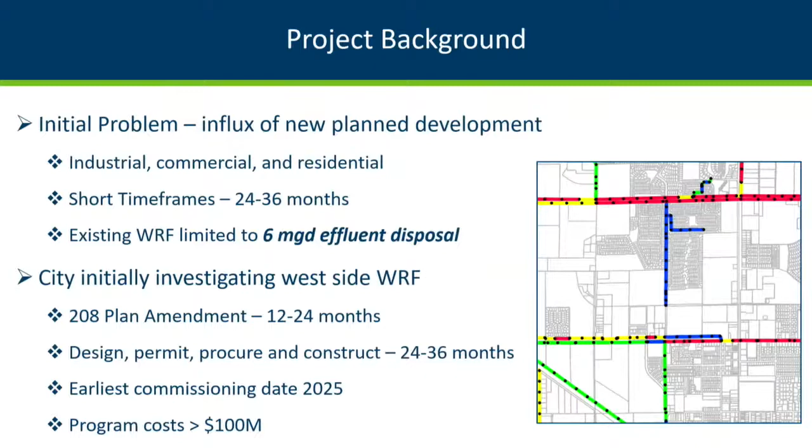So we thought we could come up with some different ideas for that. We did the wastewater capacity study starting, I think, in November, first week of November.

So the new plan that was developed was to design, permit, and construct a new lift station on the west side, because you have a lot of capacity potential at the existing WRF. You have plenty of acreage there, and it's a good, solid plant, so it would be quicker to expand that, and I'll go into that in a little bit.

So if you expand the capabilities of the existing WRF, then you can put a force main from that - that's an old figure there, but that was when we were first working on it - over to the wastewater plant, and take care of the west side that way. The east side is a different issue that we'll talk about in a second.

But then a big part of it was to develop the effluent disposal alternatives, right? So you had to solve that issue about the 6 MGD limitation. We took a look at that, and then we had that goal of getting that infrastructure in and commissioned by 2024. Once we put that all together about how this would work, that program took it down to about $34 million.

We completed that study in January 2022, and then moved into the conceptual design study. So the city said, yeah, we like that plan. Let's take a look at that and do the conceptual design to say, okay, specifically, how will we do that? And let's get closer with the cost estimates, right? So this is conceptual - that was just basically the plan. Let's actually flesh out the concept to see exactly how that would get done.

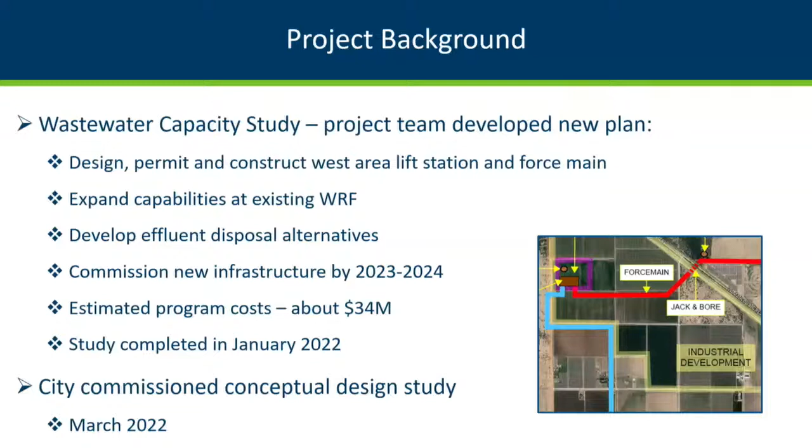And so that's what we started right after that. That was a conceptual design study, which is finished now. I think the final DCR, the sealed version, will be out next week, I believe. We've pretty much done all of that.

So that included background investigations, really go through all the existing documents, look at the utilities that are out there, look at the pipeline routes where we need to have them, look at the wastewater plant, make sure that we could do what we thought we could do, talk with the operations staff. And then have a master planning update, so get all the latest information, working with the planning department, and say, okay, make sure we're accounting for everything that we need to account for. So that was part of the project.

And then there was funding acquisition assistance. We happen to specialize in federal and state grant funding, so we helped with that and got several of those things in progress for the funding acquisition. And then we did the effluent disposal and the reuse analysis, as I talked about, and then finished the design report with the cost estimating and scheduling that I'll show you here coming up.

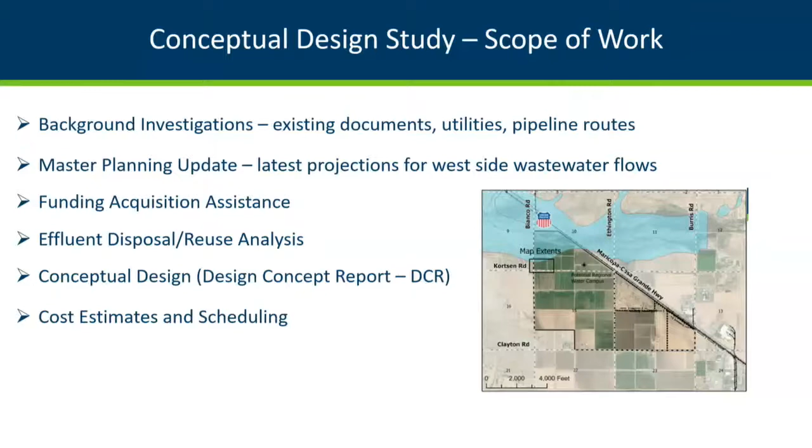Effluent disposal, that's one of the first things we approached. I mean, these were all kind of done in parallel, but that was a very important one. So we had hydrogeologists on board, actually two different hydrogeologists. Originally we thought that the injection wells might be good because they're pretty efficient if you can get good yields out of them, good capacity, but it turned out that none of the 5 sites that we looked at were viable, just weren't cost effective.

So we took a revised approach with the hydrogeologist, and that is, the primary one is we developed a reclaimed water distribution system. The idea is that you have all these new industrial, commercial users coming in, and if we provide them with high quality A+ effluent, that's a very valuable commodity that they can use and will use. So that would be an 18-inch water line from the plant to the far end of the reclaimed water distribution system. It's about 5.5 miles long as a plan.

And then along with that, we have recharge basins at the Cactus mine site. So we talked to them about using their site. That's a proposed thing - not worked out with them yet - but that would provide significant recharge of the aquifer, along with the ones that we're working on and the current WRF at the plant site that are 2.1 MGD. Once they get done, that's in progress right now.

And then, of course, an 8-inch reclaimed water line to the Cactus mine, because they also want to use 1 MGD of water effluent at that site. And that could be installed pretty quickly using horizontal directional drilling, because one of the tricky parts, of course, is getting across the rail and the highway, and that can take a long time. But if we do horizontal directional drilling, we investigated that, and it's completely feasible there, and that makes it a lot quicker and easier to get done.

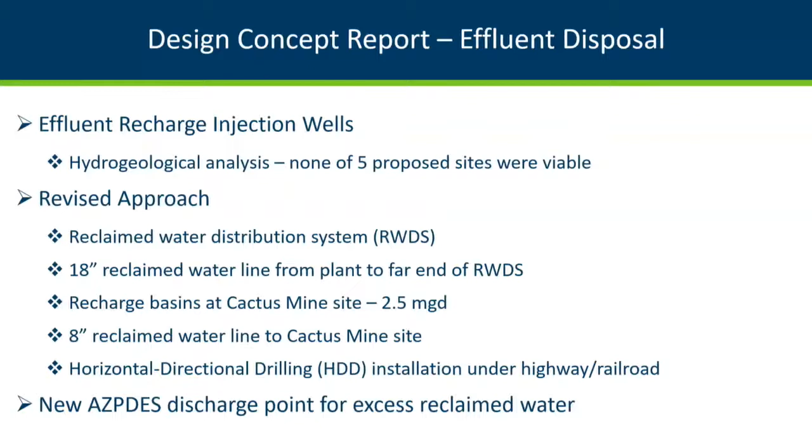So we're planning on putting, if needed, any additional effluent—assuming that can be permitted, which they've assured us it can—discharged at that point at the end of the reclaimed water distribution system line. So that's a very good alternative to have.

Going into the conceptual design study specifics here, you can see on this particular figure, the wastewater facility is to your right, the bottom right there, and then there's the blue line, which is the effluent, the reclaimed water distribution lines. You can see the one going up to the mine site and the proposed recharge basins up there. Those are both along Kortsen Road, and then that one goes up along the railroad to the mine site. The red box is the lift station, and the yellow line coming back is the force main coming back from that lift station.

So this is really kind of where that fleshed out. There's more to it than that, but that's the first part of it. So the site there on the lift station, which I'll talk about in more detail in just a second, is being obtained, I believe, for no cost from that developer that has that property there, and it's just out of the floodplain, so it'll be quick to get permitted and built.

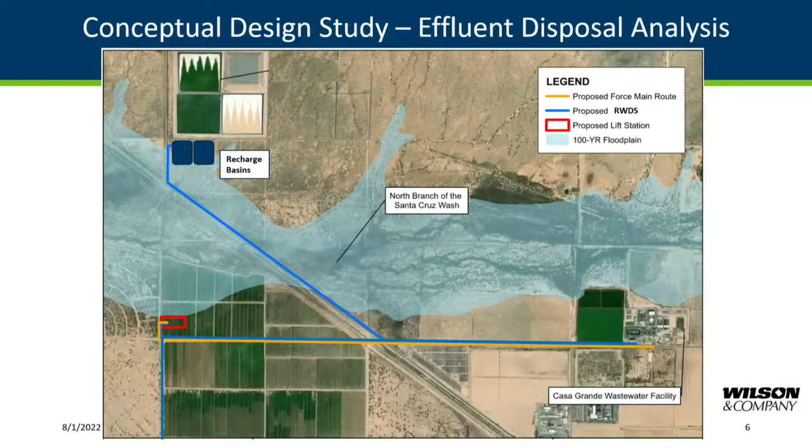And I think that's an initial phase of 5,500 GPM, and then up to 7,500 GPM expandable.

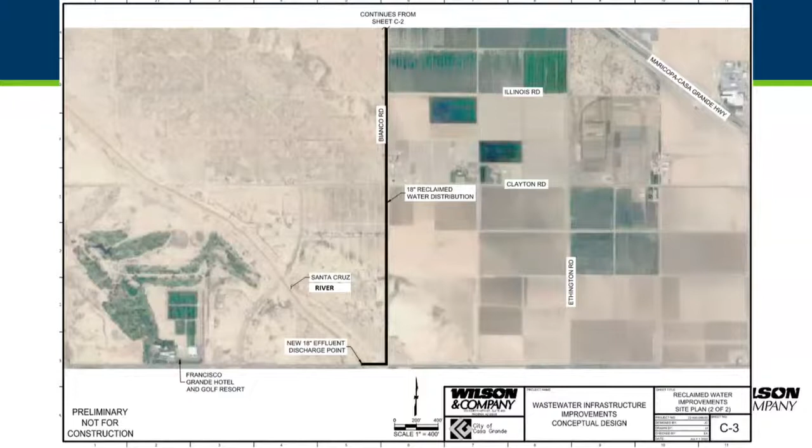So here I show, down Bianco Road, that reclaimed water distribution line continues on down, and that's the proposed new secondary effluent discharge point right by, just west of, the Francisco Grande Resort.

Then getting into the actual design concept report, we talk about the west area lift station—that one I just showed—in that 3-acre site located on developer land, acquisition pending. It'll basically be 5,600 GPM firm capacity, expandable to 9,700 GPM. Shows you how good my memory is.

And then it'll have dual 18-inch force mains with the second main valved off until needed. Really, you need to put 2 of them in there because the total capacity you're going to need 2 mains. And the reason you do 2 is that if it's too big, you do 1, but it doesn't cost that much more because it's the same trench you can put them in. If you do 1, the velocities will be so slow that it'll be very smelly by the time it gets to the plant. So you want to keep those velocities up, to keep deposits from going in there. Having those 2 mains together, 1 for the future as your flow goes up.

You don't want to start too low—that's a common mistake engineers make, is that they oversize it in the beginning, and then the velocities are so slow, it moves so slowly, especially in Arizona, it cooks on the way and becomes septic. So that would be dual 18s, but the other one would be valved off until you need it.

And then we also included the initial influent sewers. That includes a 15-inch line along where the initial development's going in on the industrial park there along Kortsen, and then a 36 to 40-inch north-south interceptor along Bianco Road, and that's where the developers out there can hook into. So that's also in the works.

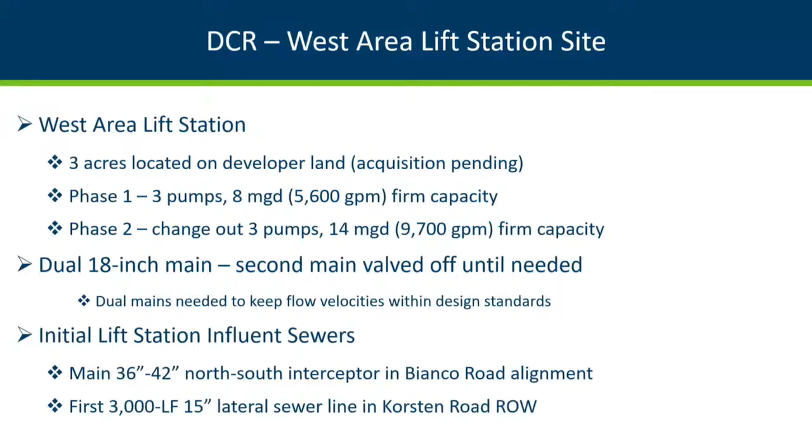Here's a blow-up of that lift station site. You can see here in the upper corner where that's positioned by the floodplain, and then the dual force mains will come out to the west, and then down and back along the Korsten Road alignment.

Yes, do you have a question? Yes, what exactly does a lift station do? I'm sorry, I should have said that.

No, that's fine. So a lift station is basically a pump station. They call it a lift station because it's lifting the hydraulic head of wastewater. So where you can't flow by gravity, you have to pump it up. That lift station serves to take the west side, which is downhill, so the sewage won't flow uphill. It'll take the sewage from the west side and pump it over to the plant. So I apologize for not being more clear on that.

But that lift station, they're pretty simple and pretty quick to build. Obviously way cheaper than a new wastewater plant. It does take some operation and maintenance, but not nearly as much as a new wastewater plant. That lift station will take all the flows from the west side and bring them to the existing plant.

Now, the 140-foot right-of-way is also not yet acquired. We don't need that much, but that's what the city'd like to do for future stuff. Those lines look pretty thick, but they really don't take a lot of space - it's not really to scale on the lines. We can also see that blue line running through, and that's where the Reclaimed Water Distribution System runs right through there and down to the south as well.

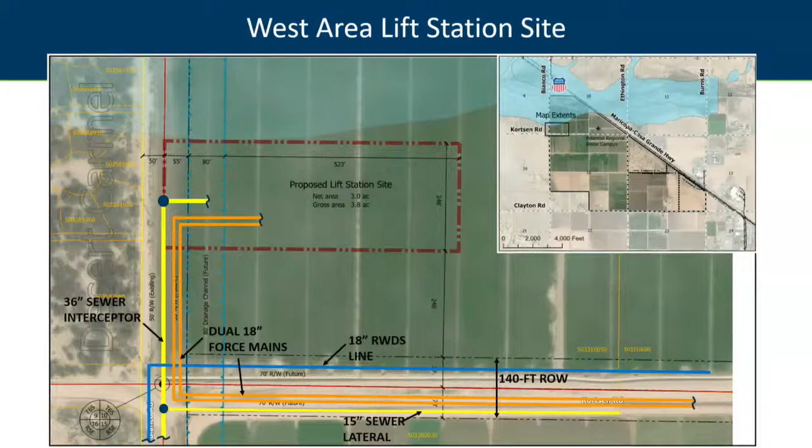Any other questions at this point?

Okay, then the water reclamation facility. This was very fortunate because, based on the stuff from the west side and the new development on the east side, you're going to need more capacity than 12 MGD in your plant. But you don't have time to make new basins. New basins, you have to excavate, do the cast-in-place concrete and all that. That's probably a 3-year cycle that you need to get through if all goes well.

However, because of the type of plant you have, there's a pre-treatment basin that was used for your commercial, high nutrient users - I guess the Abbott was used to pre-treat that. But now that they're pre-treating it, that's not necessary anymore, and we're able to convert that into an equalization basin, which means downstream of that you can increase the capacity of the plant without having to increase the downstream processes, with the exception of the biological process, because the biological process isn't instantaneous. It goes over a week's mean cell residence time, so if it's 12 MGD, it's 12 MGD.

However, we have a lot of experience in retrofitting those type of processes, because there's different ways to do that that are very successful. To get to the compressed schedule, to do everything without the basins, the two keys are to use the equalization basin as well as increase the process by a fixed film addition - that's called integrated fixed film activated sludge process. What it really is, those are cages of material that are put into the basins that have biogrowth on them. So you have biogrowth in the mixed liquor and in the biological process, but you also have it fixed on a film on these units that are independently aerated, and that can add capacity.

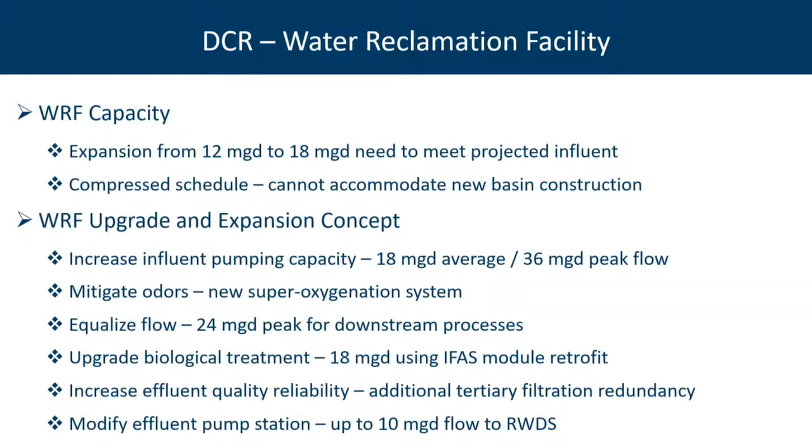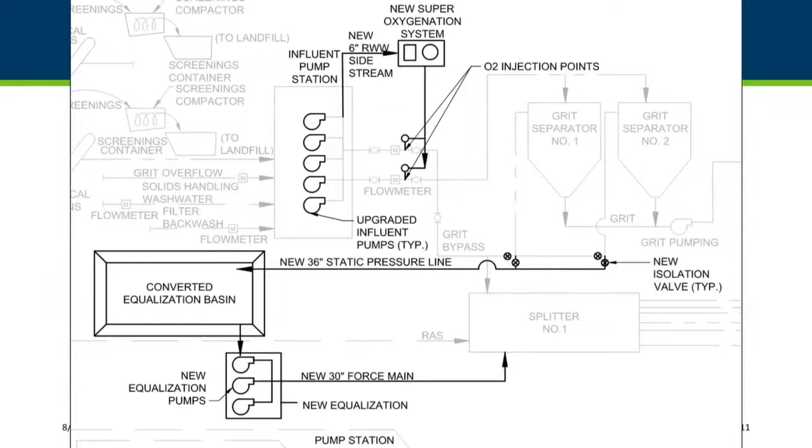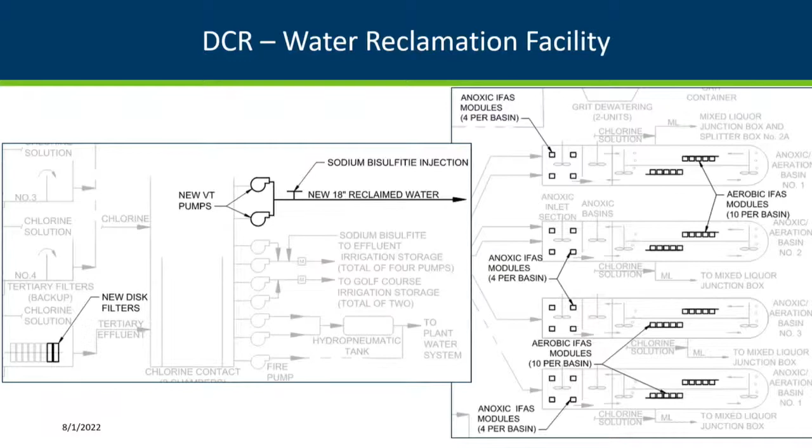Here's a few process flow diagrams if you're interested. You can see from the influent pumps in the middle top there to the super-oxygenation system, and through the existing grit separators, which are fine for 36 MGD, then to the equalization basin, and through all the process to the EQ pumps. The next slide shows from there through the oxidation ditches, and you can see all the modules going in—those are the IFAS modules—and then the upgrade of the effluent pump station and the new disc filters on the side.

So, okay. Does it clean? Sure. Is it potable when it's going through the effluent, or is it usable?

No, the effluent won't be considered potable water. It'll be the highest quality effluent, though, that is produced, with the exception of, like, if we had RO, that would be technically higher, but it's very high-quality effluent. The regulations allow unlimited use for all reuse classifications. So it's very high quality, but not potable.

Yeah, I guess indirectly so, because you recharge that and it takes it out of the aquifer somewhere else, right? That's why the recharge is very important for your whole water balance as a community—you have to put some of that back into the aquifer as much as you can. And that's on the water side, which isn't my area right now.

Okay, so summary and conclusion. The west area sewer collection capacity will be 2.7 MGD by 2024, so we'll be able to take up to 2.7 MGD from the new developments out there by that time. Reclaimed water delivery will be available to the entire west area by the first quarter of 2024. The effluent disposal capacity will be up to 18 MGD, which is what we need by Q2 2024, and the wastewater treatment capacity will also be 18 MGD by Q2 2024. So by May or June 2024, all this stuff should be in place and running.

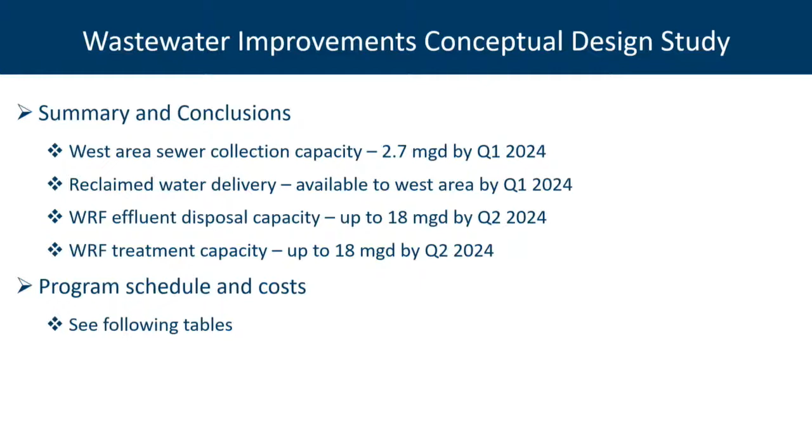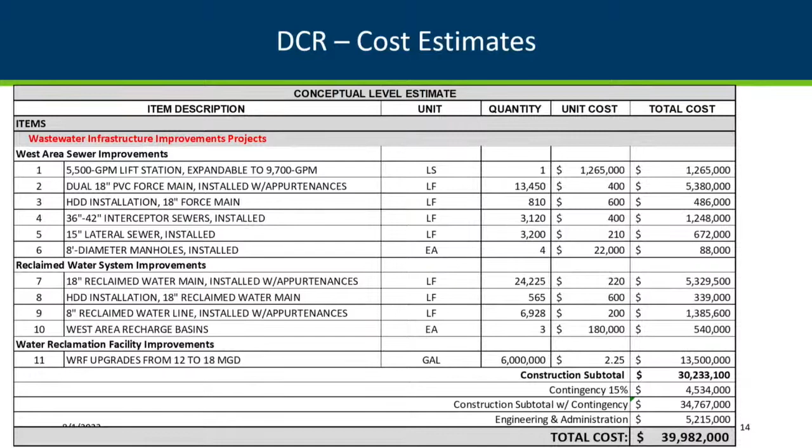That's the plan. So the part you guys probably care a lot about is the program schedule and costs. This is a summarized cost breakdown—there's a lot of numbers and spreadsheets behind it, but this is the consolidated spreadsheet. You can see the west area sewer improvements include the lift station, force mains, installation under the railroad and highway, lateral sewers, and then the reclaimed water system improvements, and the water reclamation facility for the plant. That all comes to, with a 15% contingency included, a total cost of around $40 million, as opposed to about $112 million previously.

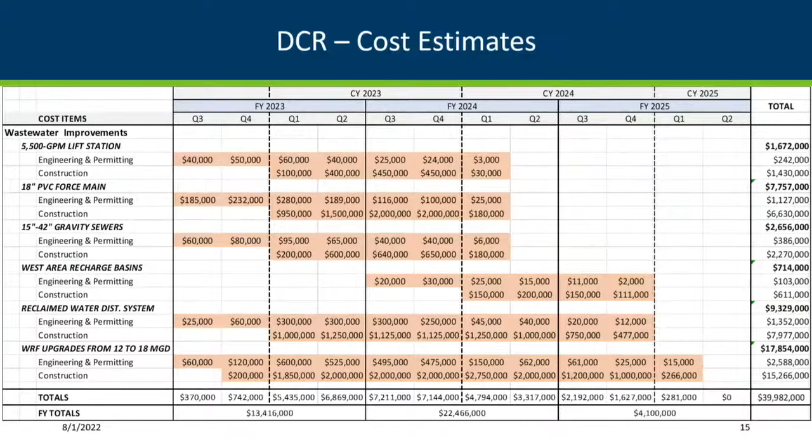Brian, I have a quick question. So the estimates in terms of the volume needs, we're going from 12 MGD to 18. Does that take into effect development that may come, industrial development along with the east side development, Larry, in terms of the large developments by Francisco Grande?

Yes, it does. We had Sunrise Engineering cover the modeling stuff, and they worked very closely with the city on all the perspective, and that's where that 18 MGD number comes from, because that's all the ones that will be in, or may be in, that will need the capacity. Some of it could be Copper Mountain, some of it could be...

Yes, Mr. Mayor. Copper Mountain would actually end up, because of the topography in that area, a portion of Copper Mountain serviced by our existing plant, and the western portion of Copper Mountain would likely be serviced by a new plant, even more westerly than our existing plant.

So this is to the west of the lift station? Correct. Okay, all right, thank you.

Anybody else have any questions? I have a layman question. You mentioned about it being financially better for that lift station, and with proper care, what's the actual lifespan of a lift station? Oh, that should be 25 years plus. At least 20 years before you need a rehab. That's how it'll be designed.

So over time, that area had deteriorated, and LGI Homes purchased the lots for resale and realized the amount and extent of improvements were going to be costly. They entered into an agreement with the city that they would bear the cost for the north portion of Mission Ranch, and the city at the time discussed fronting the cost to restore the south portion. But as LGI hired a contractor to do the work in the north portion, they figured it would make sense for that same contractor to also construct the improvements needed along the south portion, the restoration of the asphalt, etc. As you can see, this picture doesn't actually do it justice - you see a buckled sidewalk.

But as they started to do development activity and construct homes, they noticed the roadway started subsiding more because, having sat there without use, the road base had deteriorated and there started to be some significant cracks, etc.

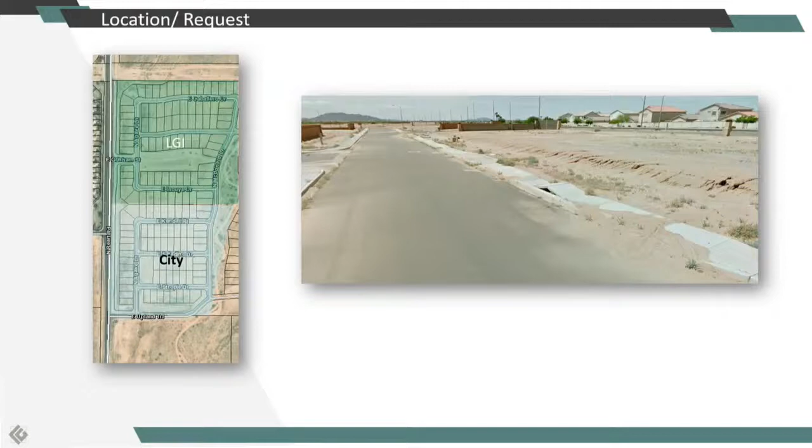So it wasn't just a matter of buckled sidewalks. LGI had to come in and tear up a lot of the streets, put in new road base, etc. So what this request is, they went ahead and provided an estimate of all the work that was done, and it came to an amount of $382,339.25 for the area that the city was going to take care of, in addition to the area that they agreed to take care of on the north half.

What this agreement entails is that in lieu of the city using or expending capital improvement funds to put towards Mission Ranch and finding a place for it in an upcoming budget, the agreement says that LGI would front that cost, which they did, and then we would reimburse them by means of a reduction in their building permit fees for other developments that they have in the city.

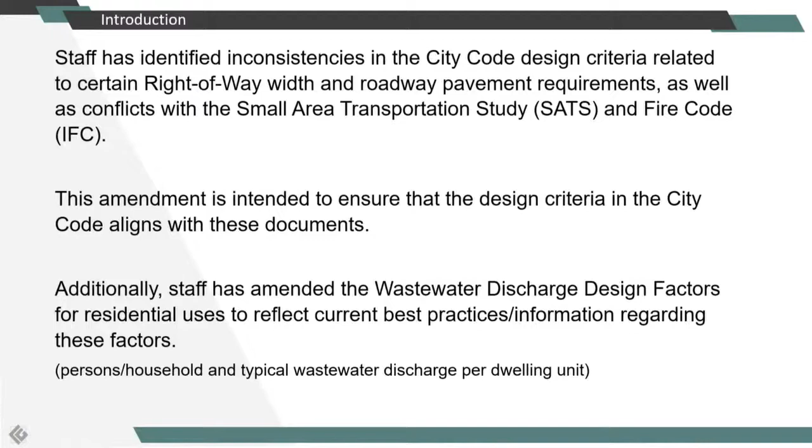The RCA attachments provided show all proposed amendments to the city codes. Below are the code sections that have been amended. Do you have any questions, sir, and members of the city council?

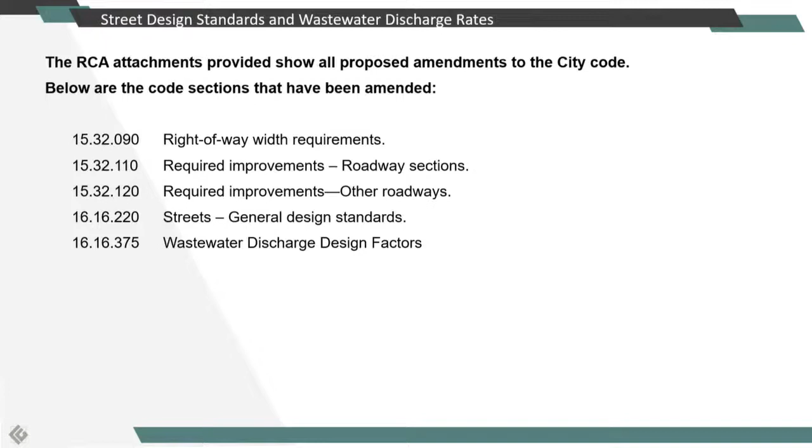This will make everything better, right? You're supposed to say yes. Caesar, you're supposed to say yes.

All right, does anybody have any questions? We saw these in a study session, right? Okay, right Larry? We had all this in a study session.

Council, I'll let Mr. Itel correct me if I'm wrong, but essentially these amendments being proposed this evening allow our code to align with many of the standards that the mayor and council has recently approved. Is there anything else on and above that?

I think that's correct. Thank you, Dwayne. So specifically to Councilman Huddleston's question, while we may not have gone specifically into each of these elements when you were adopting some of the new standards, they were ultimately included as part of that dialogue, and this essentially just allows the code to align with those standards that have been recently adopted.

I would like to say that Public Works and the Development Center work closely together on all these. Good, thank you Dwayne. Any other questions or comments from anybody? All right, seeing none, then I'll call for an ordinance number, please, Gloria.

Ordinance number 1397.15.25, an ordinance of the City of Casa Grande, Arizona, amending certain sections of Chapter 15.32, Public Improvement Requirements for Land Developers, and Chapter 16.16, Design Standards of the City of Casa Grande Municipal Code, pertaining to the design standards for wastewater discharge, streets, and other related improvements, establishing the severability of the various sections of the ordinance, and establishing an effective date.